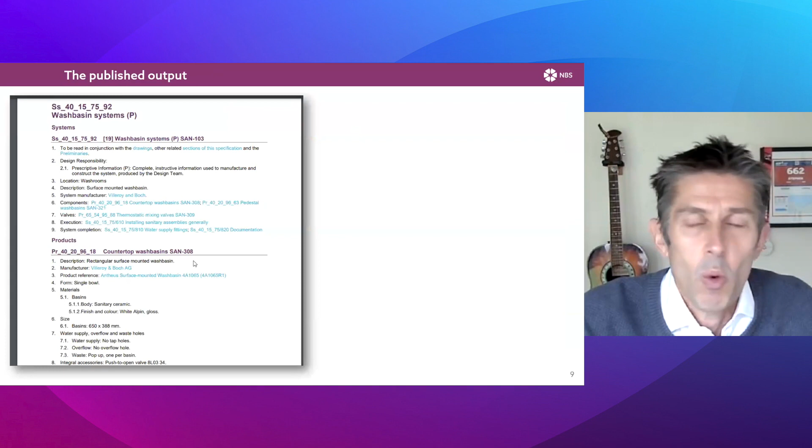So if we jump straight in, what are we trying to achieve here? What's the output? I guess the fundamental output is a coordinated set of drawings, schedules, and specification, so it's all saying the same thing. You say it once in the right place, and you can publish it in many places by using modeling tools. That's what we want to achieve.

Maybe as a stretch goal, we want to have well-structured information in formats like COBie and IFC, which Chris will also touch on. But that fundamental goal is to create a coordinated set of project information. You've got a well-structured specification on the left-hand side, and information exported from the 3D model here - a little annotated 3D view and coordinated schedule on the right-hand side.

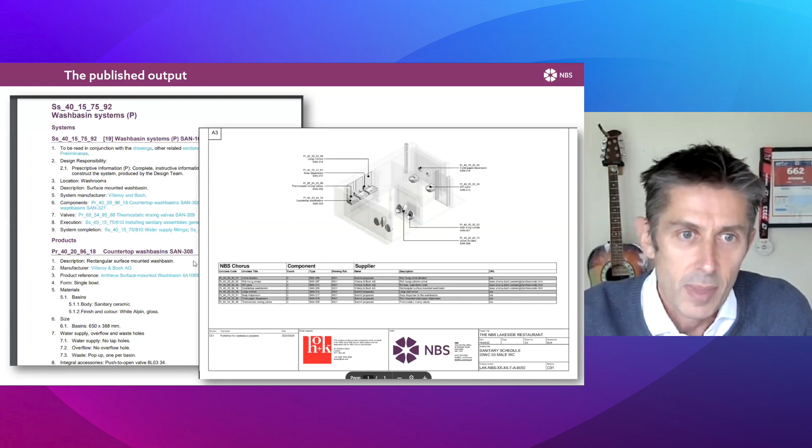The primary thing at NBS that we use to structure our information sets is the Uniclass classification system, which has a number of tables. Search Uniclass on Google if you're not aware of what it is, you can learn all about it. There's a number of classification tables looking at different types of objects that define our built environment - things like spaces, you could have classrooms, dining rooms, tools and equipment, scaffolding, screwdrivers, etc. But in terms of the NBS products, it's largely around elements, systems, products, and specifying those.

Each of these tables sits independently - you could use it to classify products in a warehouse that have no relation other than the classification groupings. But by using modeling tools, you can link information from the different classification tables. So if you are designing a building, you've got this entity code that's made up of elements - things like walls, floors, ceilings - you've got functions like heating, cooling, and then those elements are made up of systems.

So by doing your design, you're creating relationships between different types of objects. That external wall could be made up of rain screen cladding, masonry, and a lining, maybe a paint system on the inside. Each of those systems, marked SS for system codes, are made up of products - so it could be 9 or 10 products in a masonry wall, but just to highlight 4 or 5, things like blocks, mortar, wall ties, cavity trays, insulation, etc.

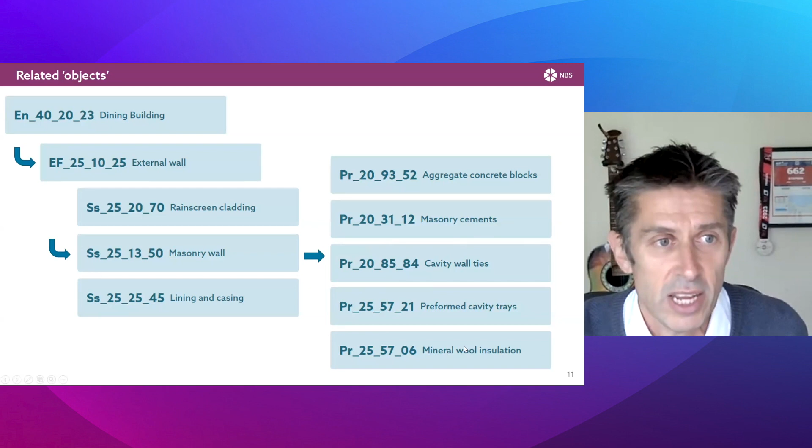NBS allows you to model and specify from the external wall all the way down to the insulation that's in that wall. So let's just have a little look at that.

This is our new early stage specification library that's going to be released later in the year - you might have seen the press release. We're doing this also with BCIS, offering cost and carbon guidance at an early stage. That will allow specifiers to specify at the level of the element.

I've got the Uniclass content on the screen here. We do have a CAWS version as well, but because we're talking about modeling information, today is all going to be around Uniclass. It allows you to specify things at the level of the elements or the function at a very early stage of the project, maybe concept design, where you can capture the client requirements, and then nail down the performance requirements you need for that entire element.

So I need the following acoustic, structural, or fire performance across that entire element that makes the building work. Throughout this modeling exercise, there's what you want in terms of performance, which then gets replaced by what the prescribed solution is to meet that performance.

So I'd like the following structural, fire, or acoustic performance, and then you can specify how that will be achieved by going to the next level of objects. So you're going from wall, which is an element, down to a combination of 3 systems that meet the requirements you're setting out to achieve.

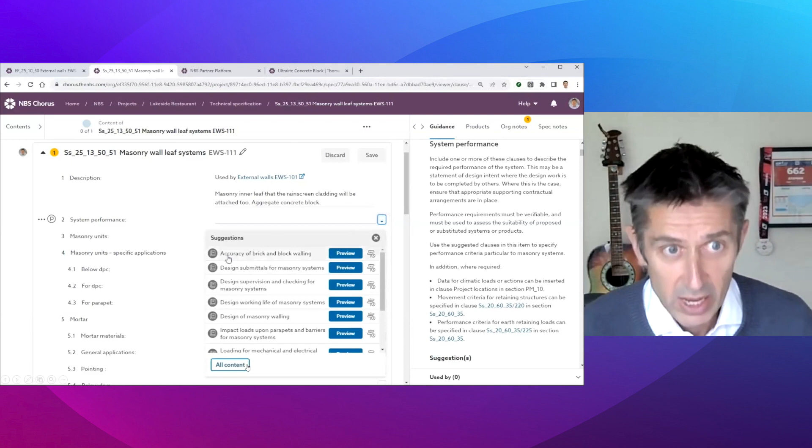So you can start that specification at concept design stage, and then as it develops through technical design, slowly build that up, modeling the links - these are hyperlinks. You come in, and you've got a software sequence here, and you go from the external wall element - once you've made that decision, jump from the wall element to the systems that make up that wall. You can see there the masonry wall leaf system is used as part of the external wall.

Just like we saw at element level, you can specify the performance - might be going into a contractor design package - or you can specify the products that achieve that performance. So you see there lots of clauses you can invoke for performance, and then a big checklist of all the different potential products that make up that system and give you the performance that you want.

So is it concrete blocks? Is it clay bricks? Is it manufactured stone blocks? Against each one of those, depending on what sort of building you're building, you can make that decision and add it to the specification.

So this masonry wall leaf system is going to be made up of concrete blocks. You can remove the items that aren't relevant - so you don't have special shapes or different mortar for below DPC, you can remove those items. And where you have got a decision to make, you make the decision.

So we've now got aggregate concrete blocks, we've got wall ties, we've got mineral fiber slab insulation. Now we've got a relationship between the element, to the system, to ultimately the products that make it up. We move from that concept design all the way through to technical design and specification now, where you specify something like a concrete block.

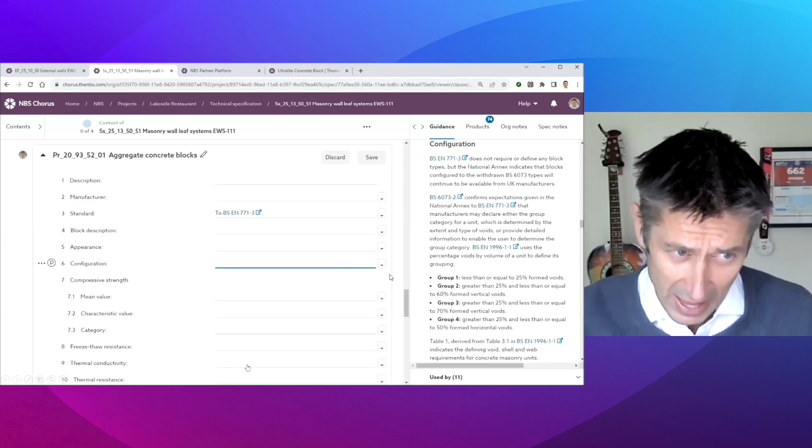Now, the next software sequence here that we jump to just shows how our technical authors research and define that template structure for a generic product. So they've researched what's the standard - BS EN 771-3. And then for each of those technical characteristics, they're defined with suggested values.

So configuration group 1 as defined in that standard, category - either Roman numeral 1, Roman numeral 2 - again using the technical information, the enumerated values from that standard. And then for numeric values, typical numeric values with the correct units that are in, so you could specify the technical characteristics for that particular concrete block.

In addition to NBS, we also model manufacturer information. You saw there were maybe 100 different types of concrete blocks from 6 or 7 manufacturers, and we sort of mirror that data structure with what's available in the market.

This is the data entry platform that our manufacturers use. It's got a few generic properties in, but for the specific technical characteristics, the values the manufacturer picks from are the same ones specifiers pick from. So we've created that common set of rules, that single marketplace.

If the manufacturer picks from the values the technical authors at NBS have authored, you get that little green tick. They can write what they want in, but if they use those defined values, it allows things like comparison and filtering. So if I search for that same category now on NBS Source, aggregate concrete block, you'll see how we've modeled that information.

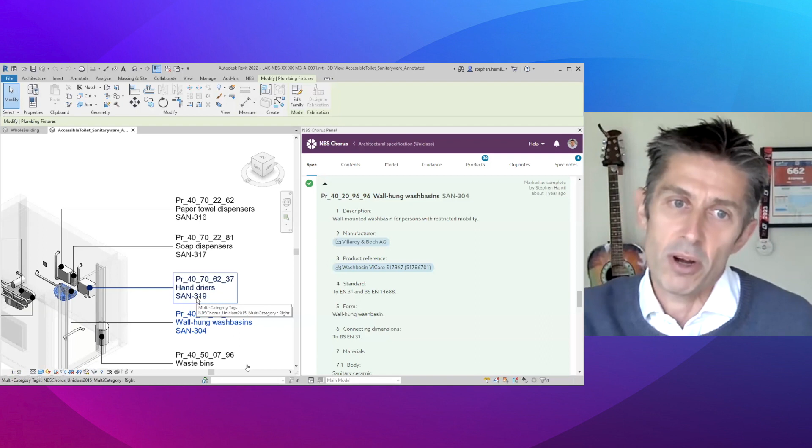The right-hand side there, you see the specification for a wash basin, is now linked and coordinated with the information that ends up in drawings and schedules that's modeled in 3D. So you've got that link between the wall and the wash basin, and the annotation for the wall-hung wash basin on the left-hand side.

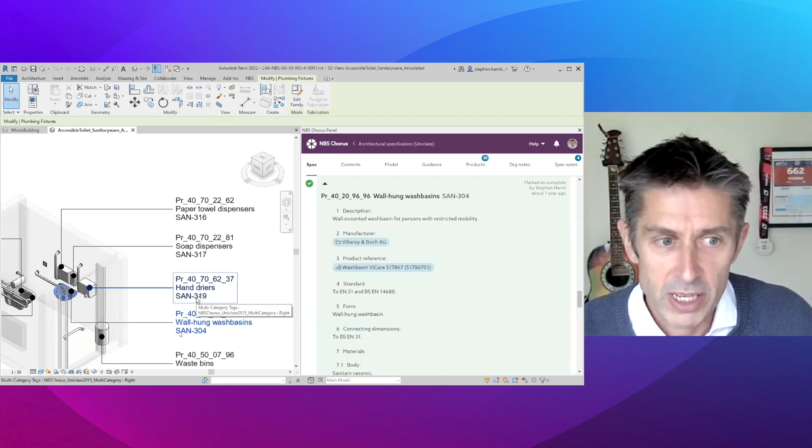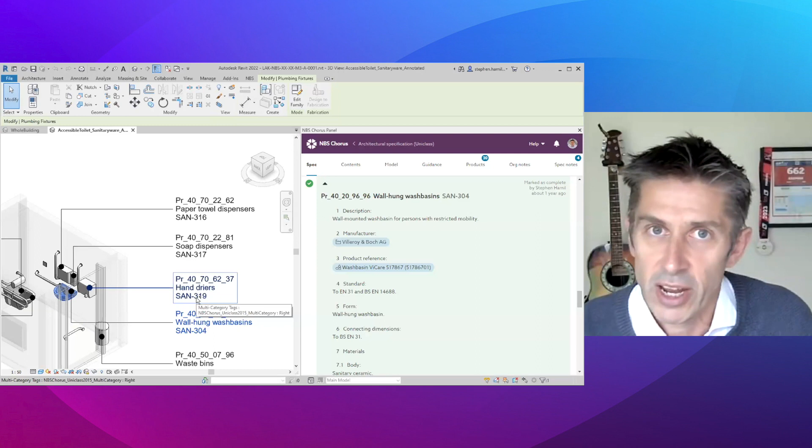What tools has NBS got to help you achieve this coordinated set of information, which gets published at the end of the day and the building gets tendered and built from? So passing on now to my colleague Chris Vickers, Senior Technical Solutions Consultant at NBS, to show how all of that information is coordinated. Over to you, Chris.

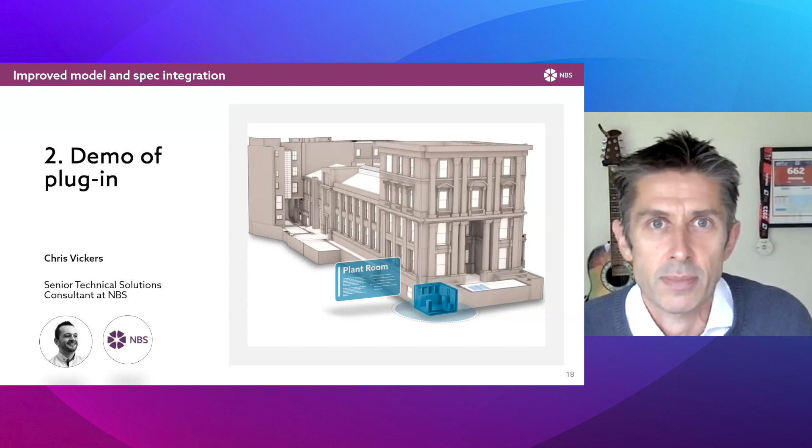Great, thanks Stephen, great introduction there. The purpose of this demo, I want to split into 3 distinct sections. First, we'll look at linking objects back to the specification. Depending on what type of object you're trying to match to the spec, the process is slightly different, but the principles are very much the same.

We'll then look at using information that's pushed into these objects and how we can extract that into things like schedules or annotated tags that Stephen showed on his screen. Finally, we'll touch on exporting IFC models from Revit, taking with it the embedded data we've pushed in, and it'll be quite high level in Solibri. So let's get started with linking objects to start with.

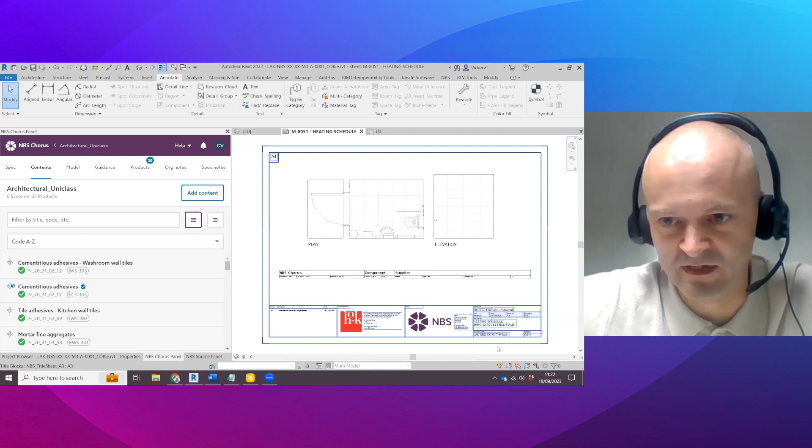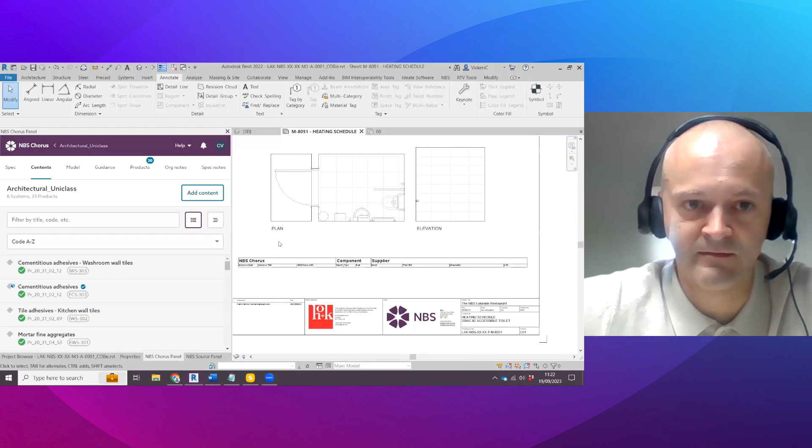Now, first of all, I'm going to just switch to this very simplistic heating schedule, and you see here in my 3D model, this is actually an accessible WC, bound by blockwork. It's got a door in there in the ceiling, so it's a mix of different product types. But currently in here, we haven't got a radiator, so we've got a plan view elevation, and then we've got a setup schedule there that's got the NBS shared parameters set up ready to go.

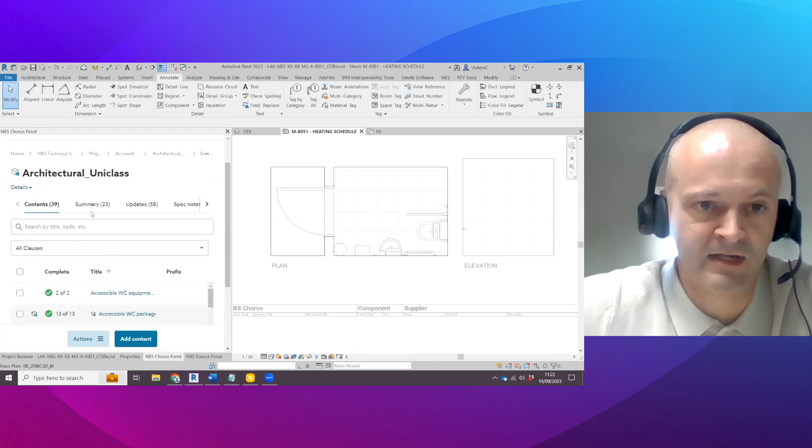Now, first of all, I'm just going to open this view, and I'm actually going to go to my mechanical and services specification. So if I just jump back into the spec, you can see there for this particular model here, we've got an architectural specification, which is currently linked and associated to the model. And we've also got a building services specification here as well.

So multidiscipline specifications, and I'm actually in here as a writer. So you can get a writer license or a designer license. The very first step is just to link these specs with your model. I've done this already, but essentially you hit the three little dots and you hit associate with model. And that's the very first step.

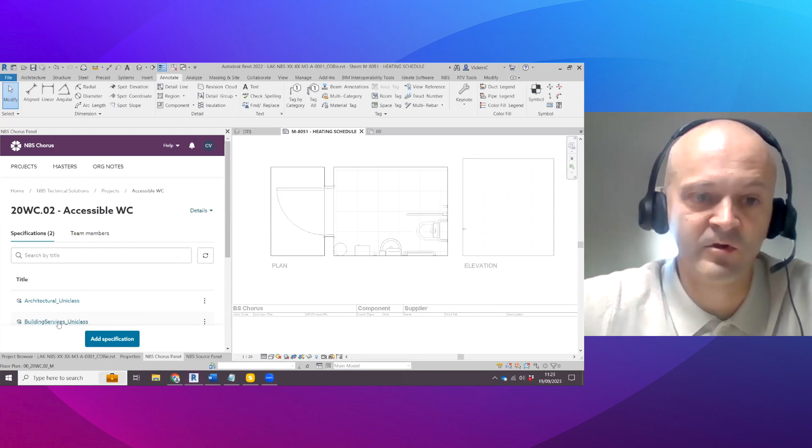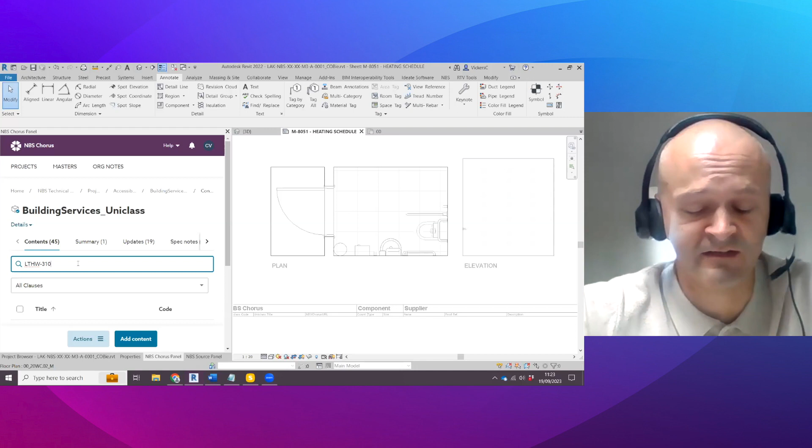But because I'm looking for a radiator, I'm actually going to just look in the spec here just to see what's been specified already. Now I'm using codes here that are aligned to the prefixes in the specification. So low temperature hot water 310, and 3 signifies a product. If it was a system, that would start with a 1. So I'm going to search for that, and you can see it's actually brought up here the radiator clause.

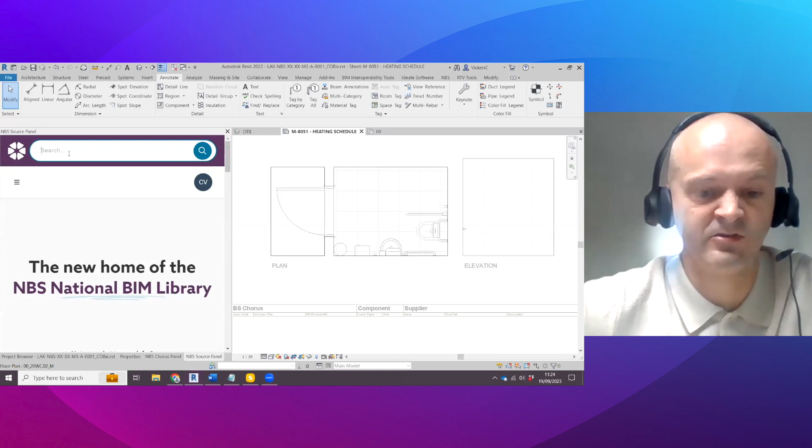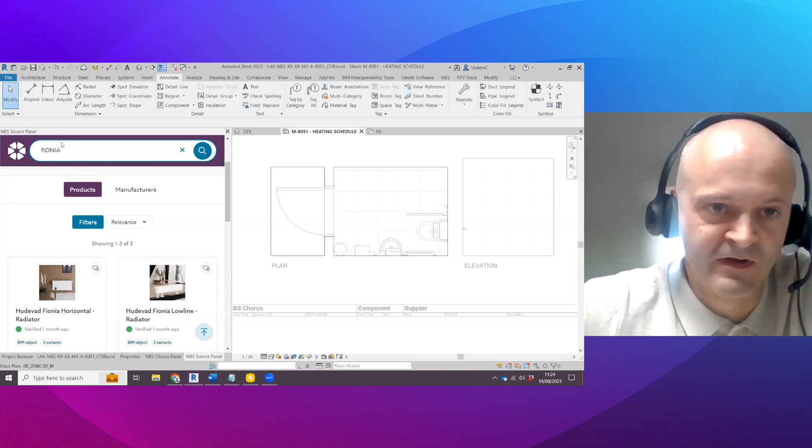So I'm now going to jump across into NBS source, and I'm actually going to search for exactly the same, so Fionia. Got my caps wrong there. Fionia, I can spell it correctly. There we are, so it's brought that. I've been very specific in what I've searched there, and it's brought that first result there is the Fionia horizontal radiator. And it's just a case I'm just going to drag this across into my model like so.

What it might do is it might update it. Yeah, so it's been authored in Revit 2020, and the plugin I'm using is Revit 2022, so it's just doing a quick automatic update of that object. And once this is done, we can obviously place it in the position as required. And there we go, the object's just downloaded.

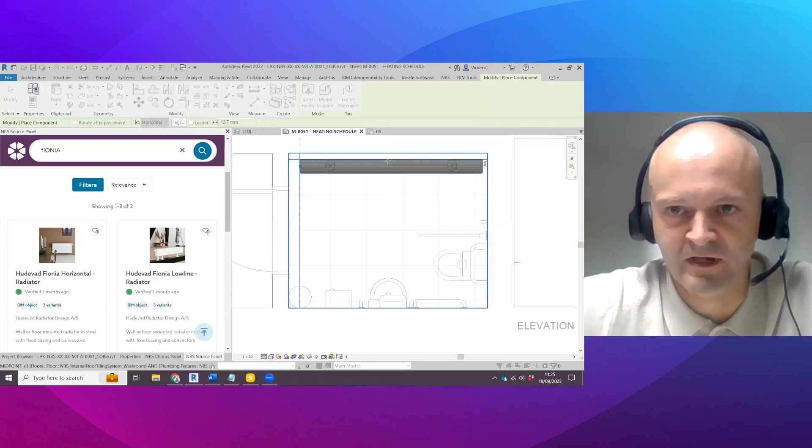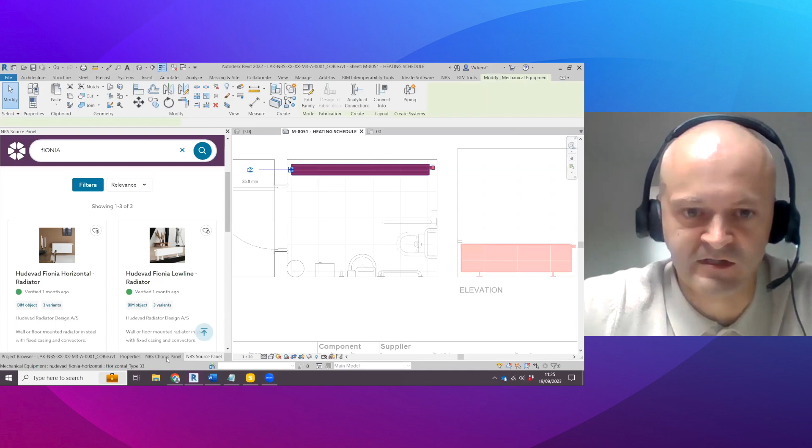You can see by default it's brought in a particular size object. You see there it's a floor-mounted radiator. If I then just click on the object itself and go into my properties, by default it's brought in a type 33, but we actually want to change this to match the spec, and we want a type 11 in there, so I'm just going to change that like so.

I'm not going to bother with changing the sizes. I could do if I wanted to, but what I want to show you initially is once I've dropped this into the spec, and I'll go into my object properties, this is a hosted object. So on the NBS source website, we host manufacturers' objects, or there's objects on there that have been created and authored by NBS to the BIM object standard. I want to use this one just because it's a hosted one.

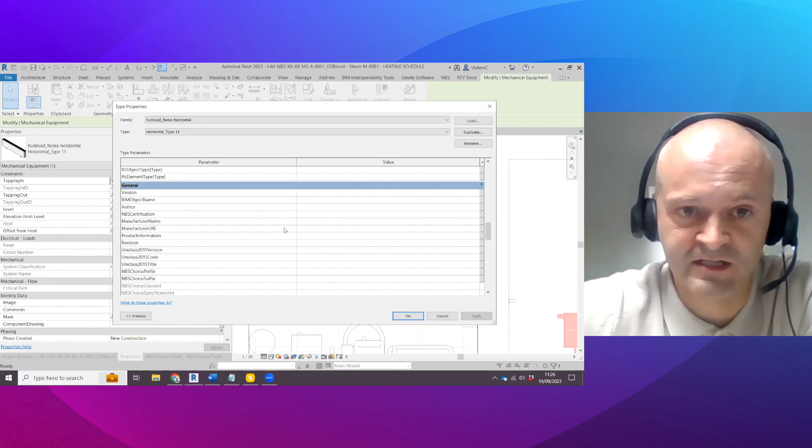It doesn't go to the same level of data and properties that we import or add or associate to these objects. So you can see here it's pretty much blank, and I wanted to show that as blank because the next step in the process is then for me to then link this back to the specification.

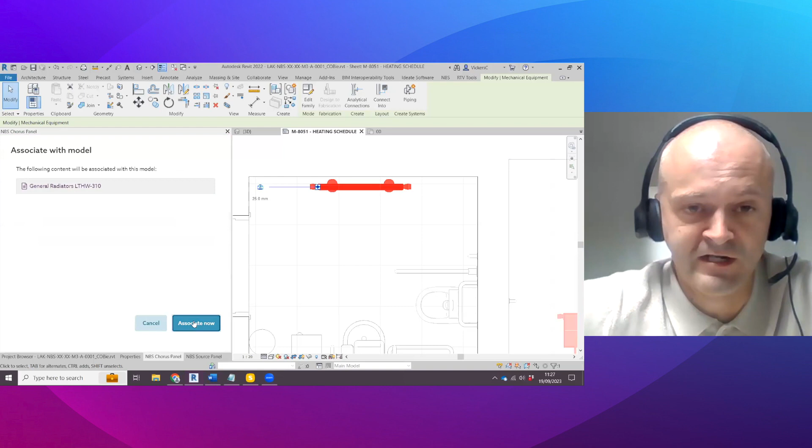So by selecting the object, I'm going to go back into the spec. I'm going to go back into the contents, and I'm going to do low temperature hot water again, 310. And this time, this is the relevant clause. I'm going to hit the three little dots, and then I'm going to associate this now with the model. Associate now, and that'll give me a little prompt there to say that now this object is being successful.

Now, if I go into the properties now, what we should see is we should see new properties that we've pushed in from NBS Chorus into the object.

So now we've got full classification to Uniclass. We've got the suffix from the specification as well. And then we've got 3 read-only GUID properties here. That's the clause of the actual spec, where I've just made the association. We've got the actual specification ID, and we've also got the project ID as well. So all that information is now embedded into this object.

And then you can see we've now got these additional properties. We've got NBS Chorus category, which is the clause number and title. We've got a manufacturer product URL — this is a link that will take you back to NBS Source to that particular product page. And then we've got the product reference, which is the name of the product, the manufacturer's name, the chorus description, which is the actual description within the specification itself. And we've got the chorus URL link in there as well.

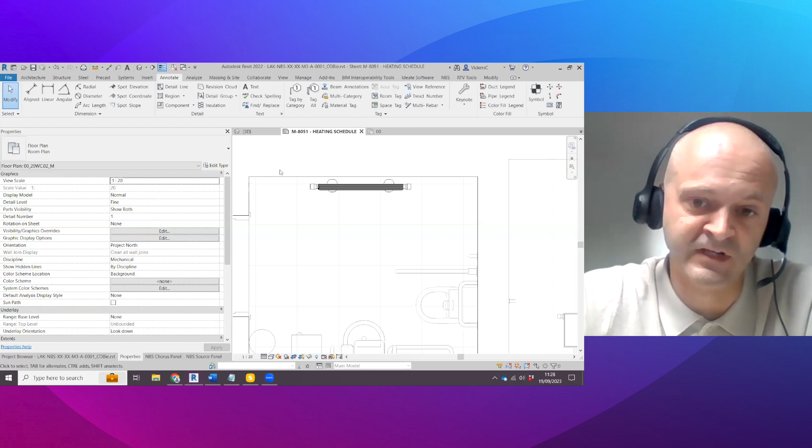And you can see I've had to do no manual work to push that information into that particular object. So those are the new properties. We've actually expanded on the number of properties we've pushed in there, and this is based on user feedback — they wanted to use more information in the drawings. So that's what we've gone ahead and developed.

And then you can also see, as I zoom out, it's also automatically generated this schedule. So Uniclass information, the chorus ID, the type name, the count. There's a bit of manual work there to specify the actual size, to make sure the output of the radiator heats the room correctly. But then we've obviously got the supplier information that sits alongside that, and this is all being pulled from those properties we just embedded into that object.

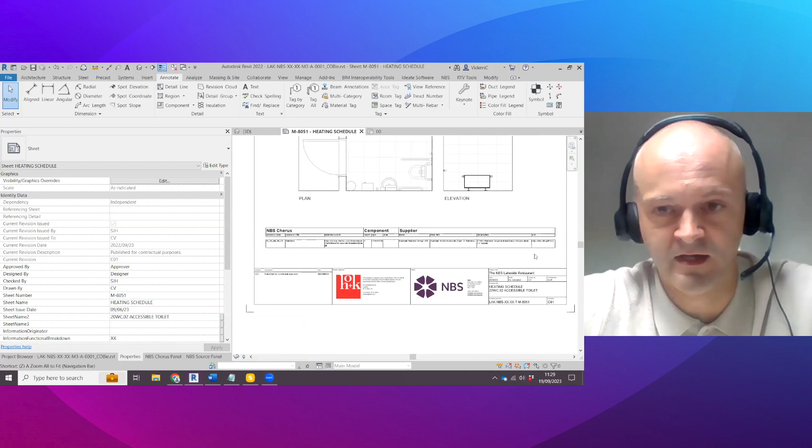So for a component object, it's pretty easy — click the object and associate it via the 3 little dots. Now, if we move to what we refer to as a layered object, or in this instance, this is actually a system — so it's a system object, not a product object — you've got a system that's then built up of different layers.

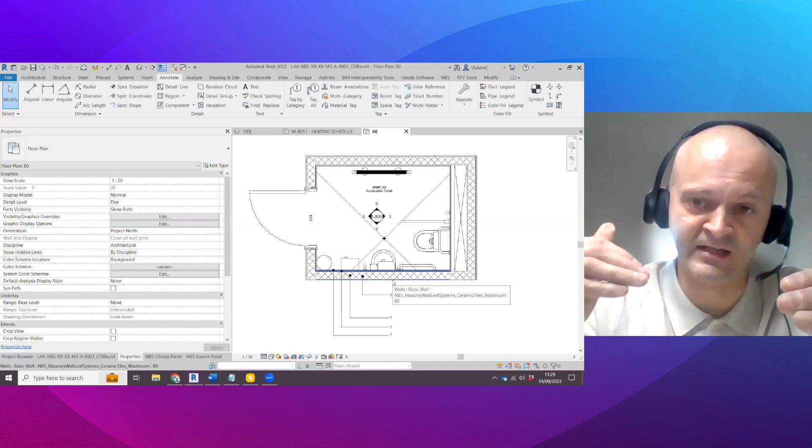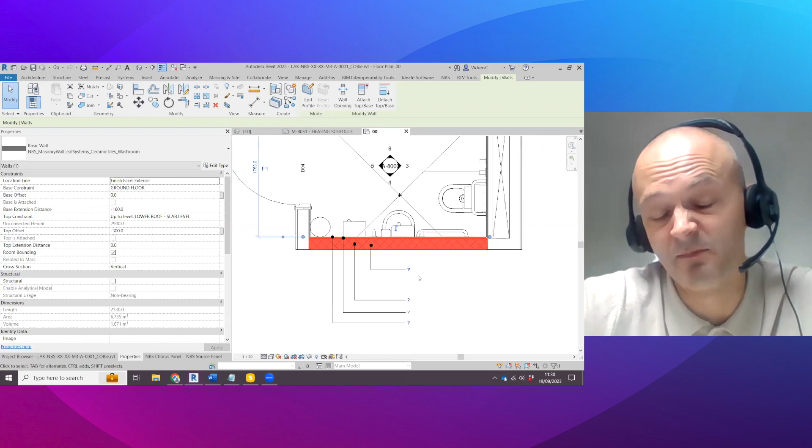And in this example here, it's a blockwork wall, and then it's got adhesive and a tile finish internally. But to associate this to the spec, it works in exactly the same way. So I'm going to click on the wall, and you can see I've got some tags associated here already, and they're all blank — purely because I haven't associated this wall type yet back to the specification.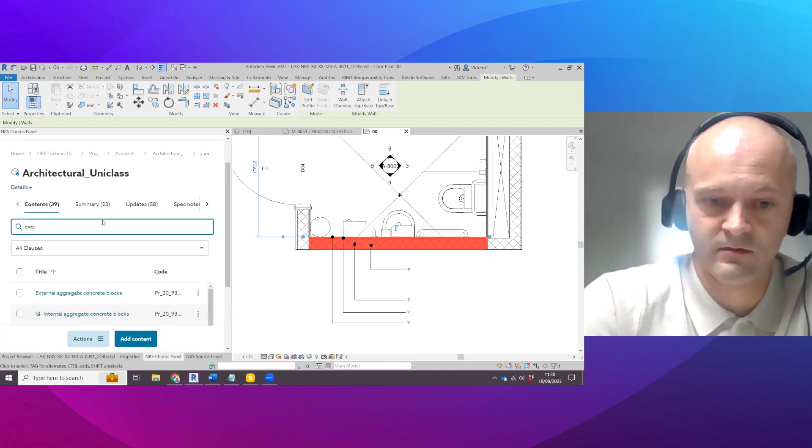So I'm going to go back into NBS Chorus, and this time navigate to the architectural specification. And this time I'm going to use the suffix EWS 102, and the 1, as I mentioned earlier, signifies that this is a system. You can see there it's brought up that little system code. And exactly the same way as previously, click the 3 little dots, associate to model.

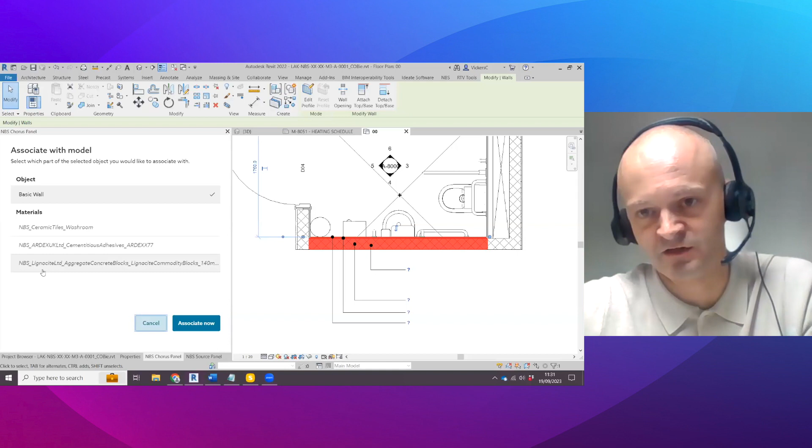Now, this time I have a few options. I can associate at the overall object type level — in this case, it's the wall as a system. It also gives me the ability to predefine the materials there as well, so I can drill down to that next level in classification, from systems to the individual products that build up that system.

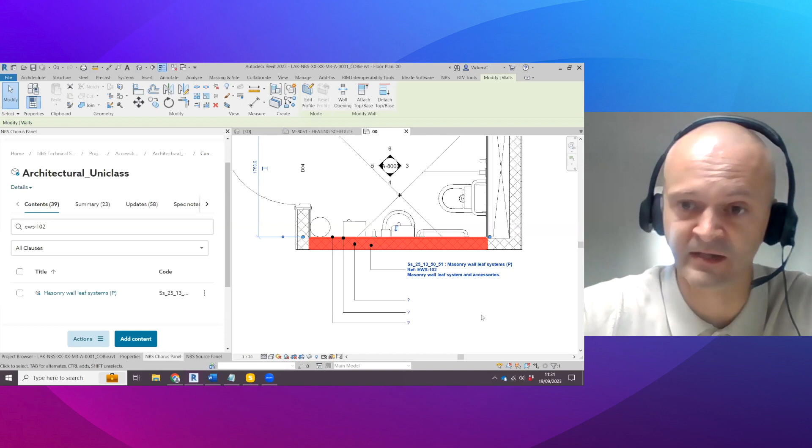So first of all, I'm just going to select a basic wall and associate that to the specification. And you can see straight away there, it's automatically embedded that information, and brought that through the annotation tags — the clause code and title, the suffix reference, and the description within the specification. Obviously, these tags can be manipulated and changed however you want them to appear. This is just an example of how we can customize these to suit.

And then to do the individual materials, you simply work through this. So I'm going to do IWS 307 — now I'm going to do the ceramic tile finish on this layer. I'm going to click associate with model, click the ceramic tile layer there, and associate that now.

And you can see there, again, it's bringing through that information. I'm going to do the same for the adhesive — associate now.

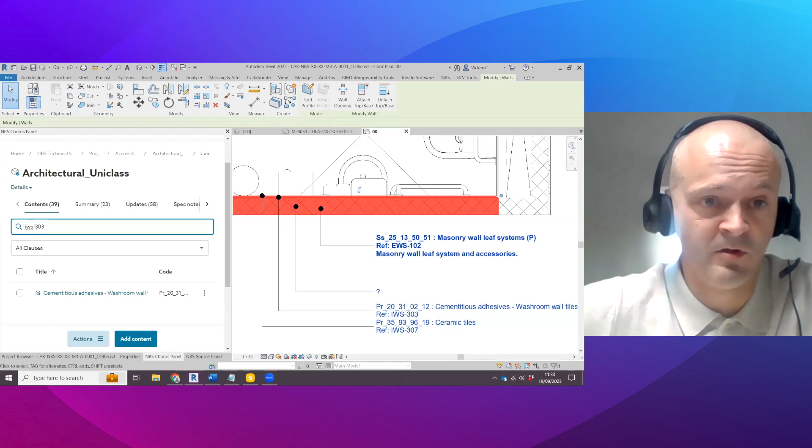And then finally, I'm going to do the same for the block work. So for the block work, we've got EWS 304. You see there we've got internal aggregate concrete blocks, click associate with model, and the last one in the list there is the block work, and associate that. So a slightly different process for layered or built up objects, and it'll be the same in the scenario for a ceiling or for a floor, but really easy. Same principles. The three little dots, associate that with the specification, and you can see there in terms of annotations, it's brought through all that information.

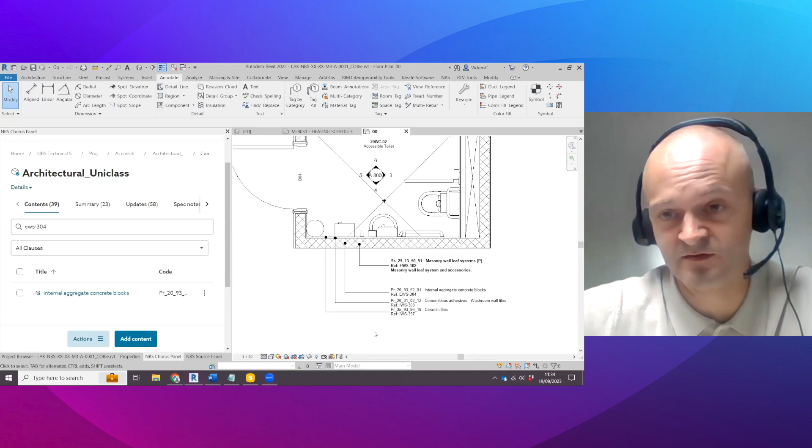So I haven't again done any manual manipulation. It's pulled all of the information live from Chorus within Revit itself.

So naturally, as the project progresses, there might be instances where the information in the spec has been updated. It could be things like descriptions, classification, probably not, but descriptions most definitely could be. The description might change according to location, so above DPC, below DPC. If this does happen, and we'll do a demonstration of how to fix those changes, because they don't automatically then pull through into your annotations. There is a bit of a manual QA check to do with here.

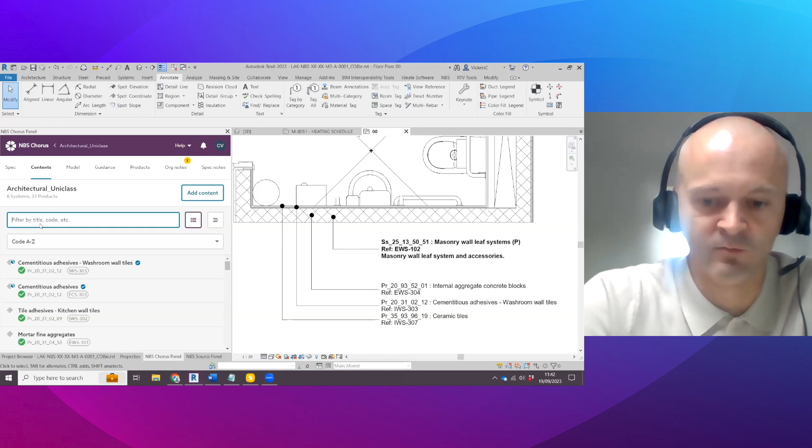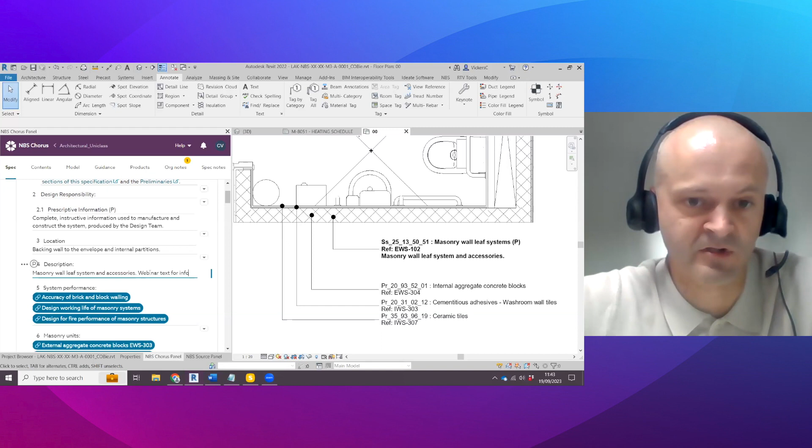So what I'm going to search for now, I know I've been shown suffixes here, but it does also pick up keywords, so it can pick up keywords in the classification title. So for the masonry wall leaf system, you can see there I've started to type masonry, and it's brought up two clauses there, the cement and the system itself. So within the system, I'm going to come in here and change the description. I'm just going to put in here 'webinar text for info', as an example, and I'm going to save this.

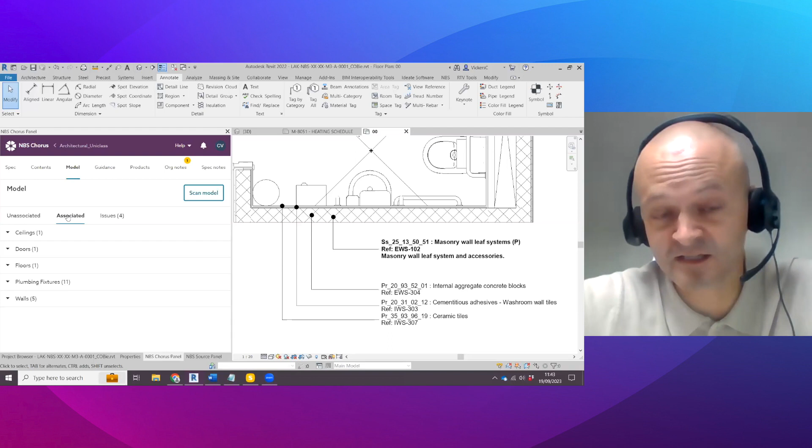Now, as soon as I save it, within Chorus itself, we have a model tab, and just to talk you through what this is shown here, we've got unassociated - these are all the objects in the model that aren't linked back to the specification. We've also got the flip side of that, which is everything that is associated. And we've also got a few warnings in here as well. You can see we've got a few parameters that don't match, and we've also got an error here for the masonry wall leaf system. Now it doesn't tell me it's because I've changed the description, it's just telling me there is an error. So I can come through, go through these lists here, and I can just fix.

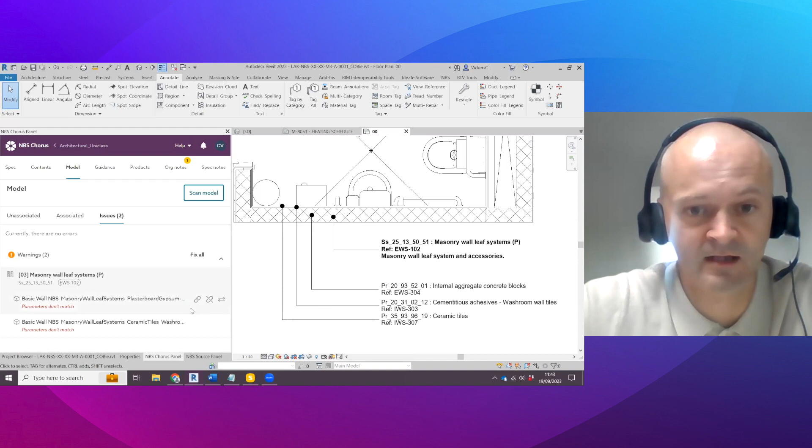I can do a fix all if I want to, or I can work through these one by one. And you can see as I work through them, it's then automatically updated the annotation tag coming through there, so 'webinar text for info' is then displayed. So it's a bit of a QA exercise to go through, and it's quite nice just to get into the habit of going through and validating that the two are in parallel, because you might be working in Revit as a designer license where you can't make changes in the specification. So sometimes the two will become sort of untangled.

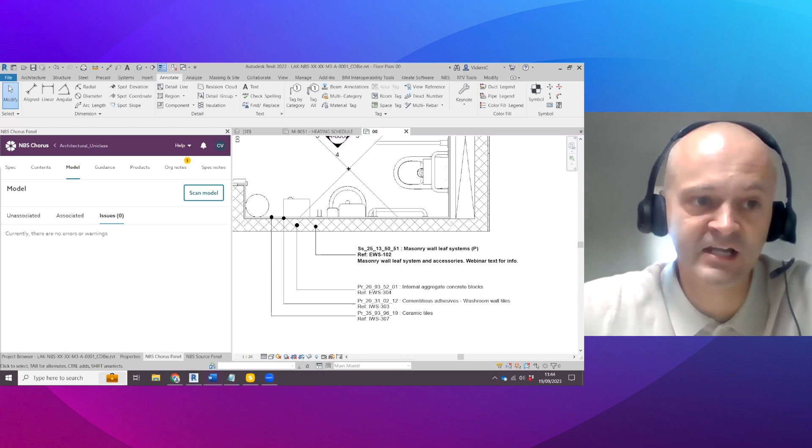So in terms of annotations, that's really how they work - pulling information in, they then can be manipulated and automatically updated. So that time-saving element is really nice when we look at annotations.

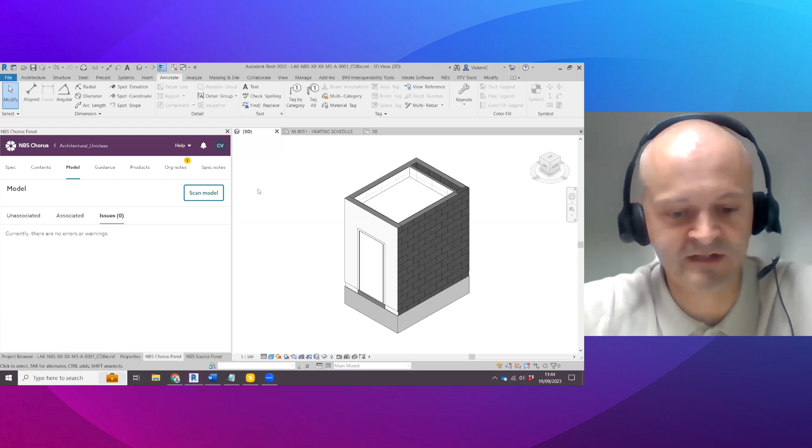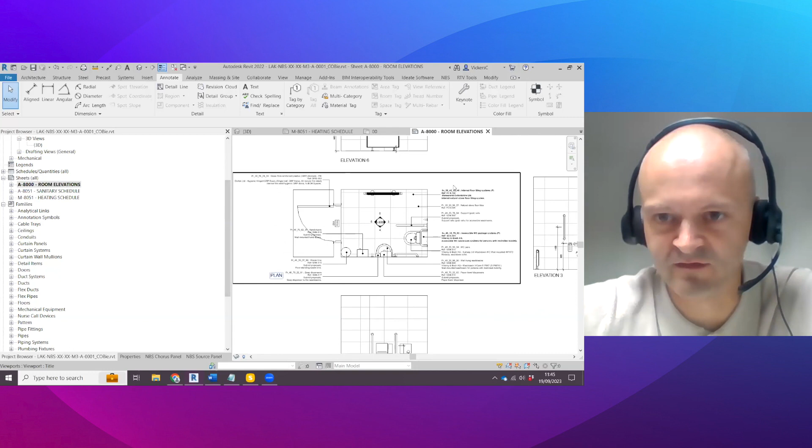The final thing that we wanted to look at is the use of IFC and the export of IFC from Revit. Going through annotations, as I've demonstrated there, is very much in terms of outputs what we've been doing for many years, not only on a PC, but going back to the early days of specification, where references to the spec and clauses would be handwritten on drawings as well. So typically, you would as an output PDF things like this example here - these are room elevations, and you see everything sort of annotated up nicely there, all the different components, etc. But we've got to think about the bigger picture, and not just sharing information with the design team and contractor and specialist subcontractors, but also maybe thinking about things like facilities management and the in-use side of it.

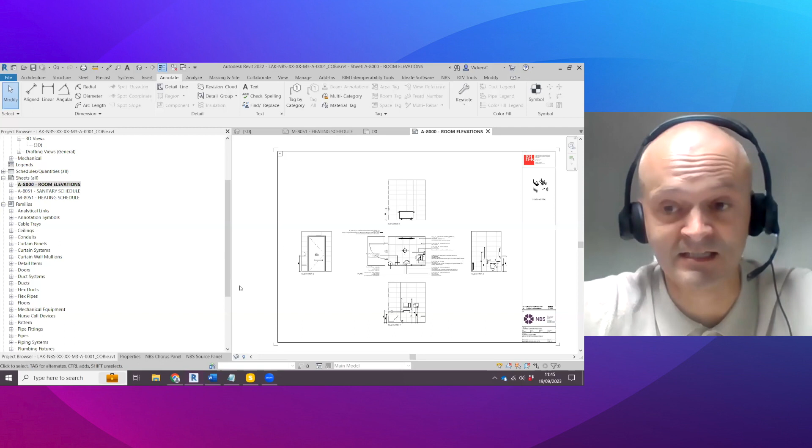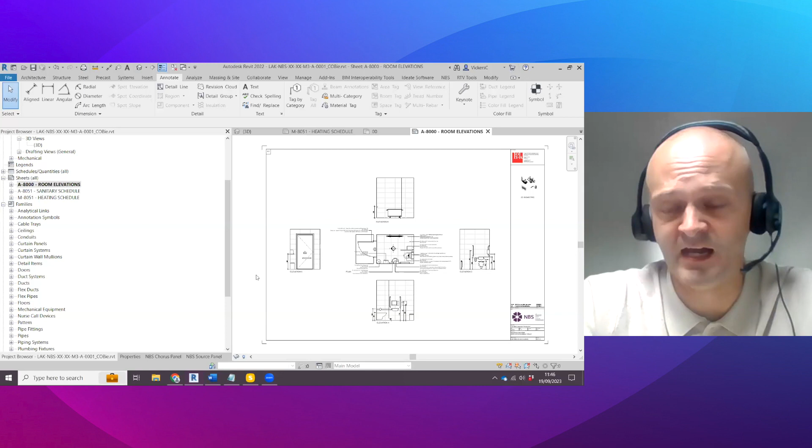And that's where really IFC comes into play. It's supported within the ISO 19650 documents as well. So just to talk you through some of the things we've been looking at to help the export of IFC, Stephen's already mentioned the work that we've already undertaken, looking at the relationships between Uniclass classification and IFC classification - that's very much object type in the IFC world.

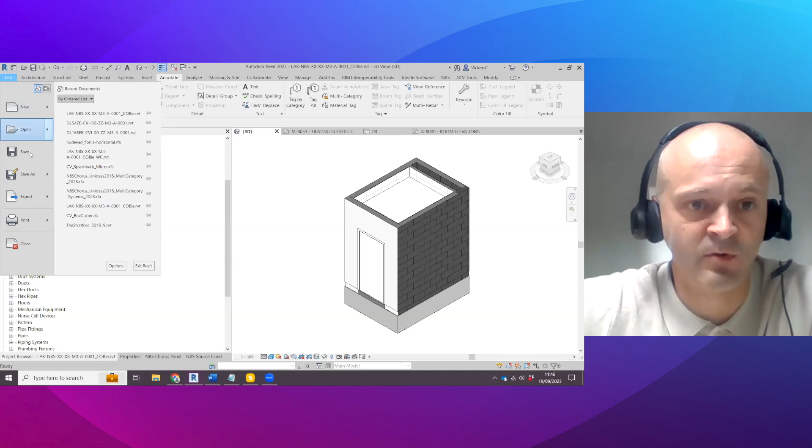Just to show you an example of IFC exports, again using this very simple 3D model. First of all, I would have to be in a 3D view. And then if we look at the export settings in IFC, we'll talk you through some of the things that we've been looking at. So we've set up our own step file.

When I say step file, it's the current setup that we've pulled together here. I've named it NBS COBie. If I just click modify setup, I'll talk you through some of the key areas here that we've looked at. It's mainly to do with classification settings, so how we can export Uniclass from Revit and take that into an IFC file.

You see we begin to populate a lot of the Uniclass metadata - the name of the specification tables, who's the publisher, and edition. For edition, we've indicated here the latest versions of those tables, so elements is 1.13, products is 1.31, for example. The edition date is aligned to the last time the tables were updated.

And because they're updated every quarter, we've just picked that time of when we've embedded this information. We've got document location, and then we've got classification field name. Now this links directly to IFC classification in the IFC schema world, and these are the two properties that we're actually pushing into our objects. So these are getting embedded, and these are displaying the clause code and the clause title. It's just telling Revit here that when we go into the IFC world, they're the properties that we want to pull with it, to pull that classification information from the objects.

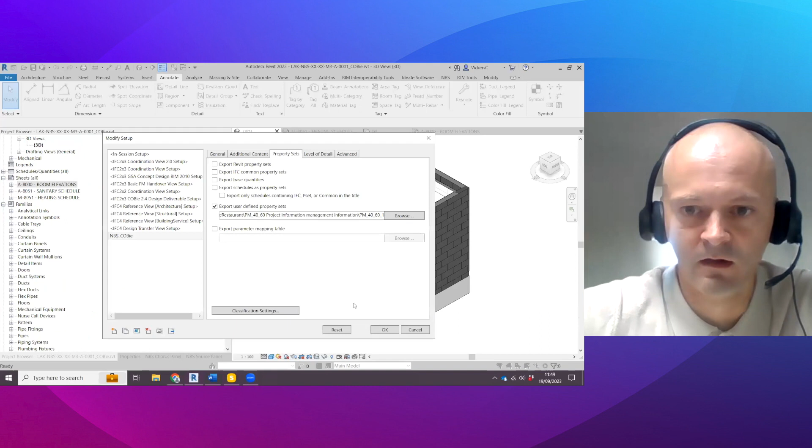One thing I didn't show - if I just cancel this, and if I just click on the wall, I'm just going to quickly show you the wall properties. Because if NBS do author content, we always embed by default IFC information. We've got general information such as the name of the object, who the author is, the version of the object.

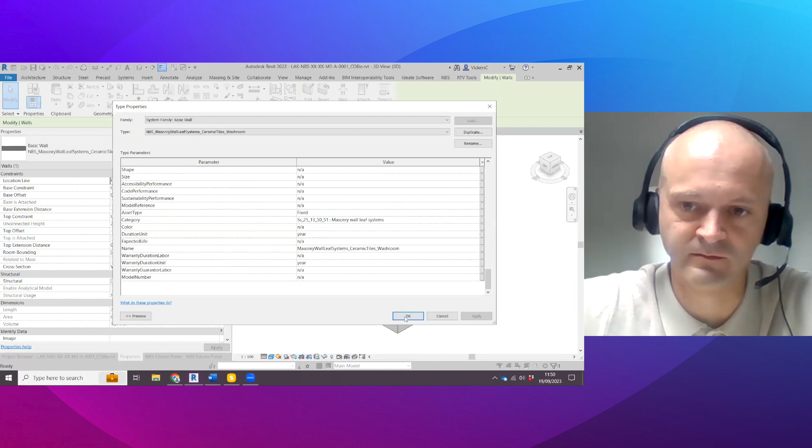You can see the embedded properties from the specification, but then we've also got Chorus information in here under other. These are all any object by NBS authored to the NBS BIM object standard. So that's why we've got a mix of hosted, which might only be the geometry and the sort of functional properties in there, but if they're authored, we in addition include all the data side of it in there as well.

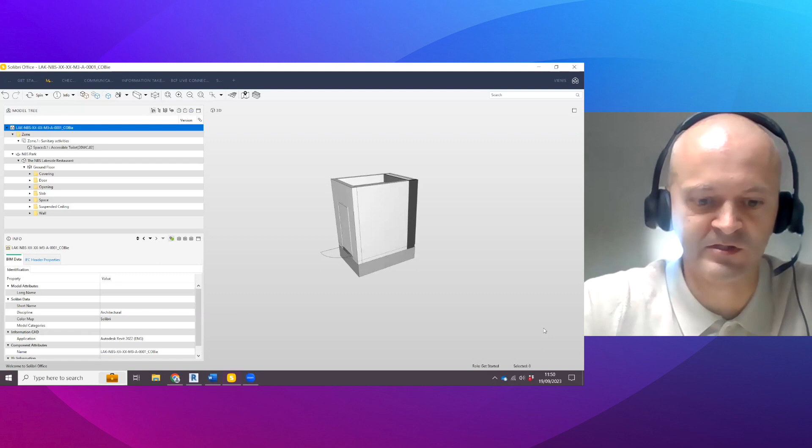So once we export that to IFC, it will take all that information via the mapping file and via the classification and metadata into a software like Solibri. You can see on screen here, this is the very simple model exported. And if I just switch off the walls, for example, you can see in here it's brought with it all the different components in there as well.

So just to talk you through a few things in Solibri, you can see we've got the model tree on the left-hand side here. So we've got the project name, you can see we've got zone information coming through here, and then we've got the spaces come through here as well.

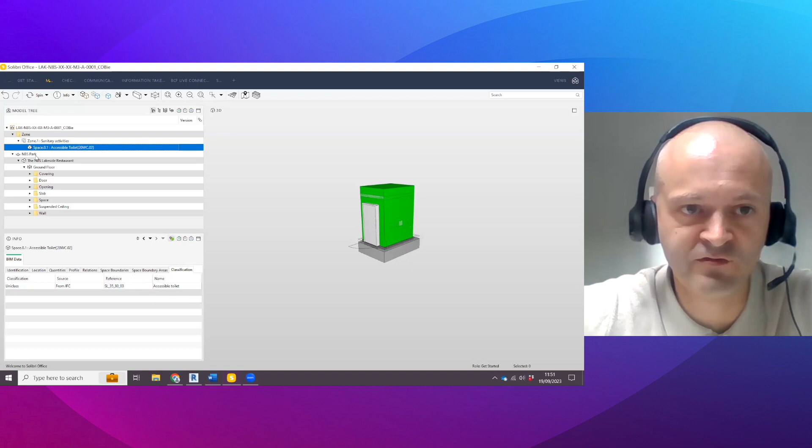I'll just click on the classification tab here. You can see that it's pulling through Uniclass, pulling through the reference, the code and the title with it. And as you go through the tree, we've got the site information, so there's the entity table reference there. And then as we work through into the ground floor, which is a level, you've got all the components that are on that floor.

Really nice to see that classification Uniclass come through as expected. Then as you click on the components themselves, you see that at product level, PR codes are coming through. We've also got some IFC standard property sets, so that's the manufacturer occurrence and manufacturer type information. It's also brought through all the COBie property sets as well. We've got assets, the COBie information, the warranty information, and we've also got the general information in here.

We've also got the NBS specification tab as well. So these are all the properties that have been pushed into the objects on the fly at point of association to the spec, and you can see it's brought everything with it. It's also brought with it clickable URL links as well. If I just click on the link there, it's brought me straight to that .tech page, which is really nice. And it's the same for any other object in here.

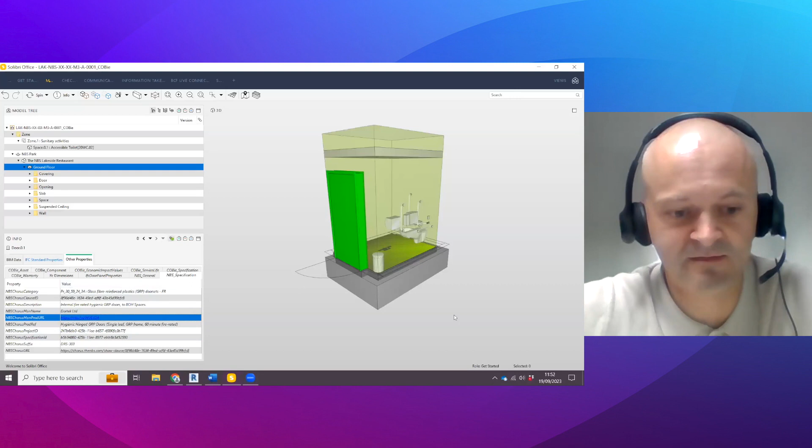I can click on the toilet. If I just get rid of my space and come down into my components, I'll use... let's have a look, let's do the wall. We'll do the wall there.

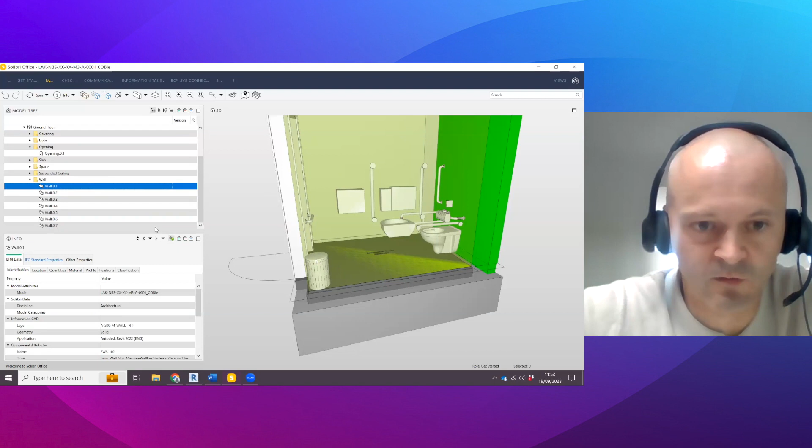Again, all the classification information is coming through. So if I just turn off the space in my model and click on the individual products that make up the Doc M pack, you can see WC pan. Again, it works in the same way. All that information is being pulled through, and I click on the link there, and it will take me to this product page, like so.

Once you're on this point, it's probably worth noting that it's using the permalinks on NBS Source, so it's that point in time that the object was downloaded, or the point in time that it was associated to the specification. So in 3 years down the line, this product might have been updated, so you'll get a prompt there if you hit this landing page and it's out of date. You get a prompt to say this product has been superseded, do you want to view the historic information?

But you can see at this point here, you've got contact information for the manufacturer, and you've got all the specification data that sits alongside that, all your objects, etc. So from a facilities management perspective, being able to use the IFC file to look up manufacturers' products, where you might find contact information, which sits in parallel with COBie data - that whole idea of being accessible.

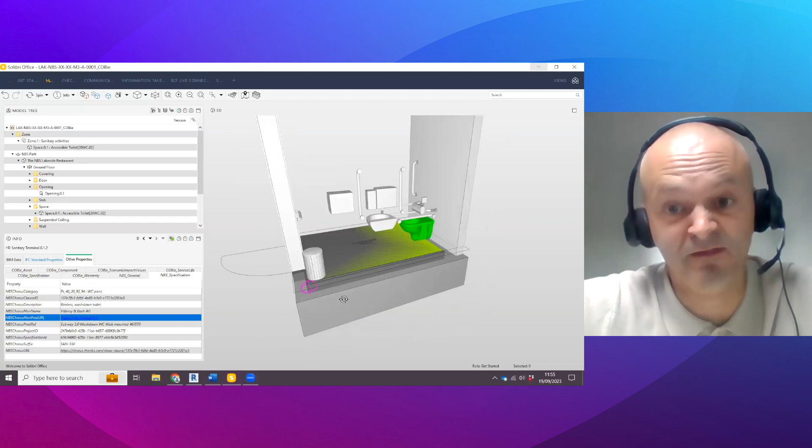So using, repurposing the data from Revit, but just using it in different ways - a really nice way of being able to think about the value of data. We spend a lot of time pulling data together, it's just how then we use that to suit what it is we're trying to do.

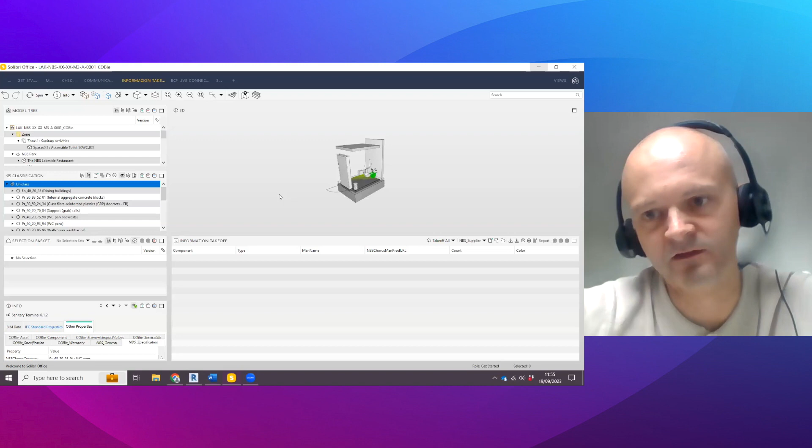Once obviously all that data is in there, you can see on the tabs it clearly indicates it's come through well structured. We can begin to think about how we could potentially use that information to pull off run reports. Again, just trying to think about some of the things that we might do - this is all quite high level and simple examples here, but we've got a few set up here already.

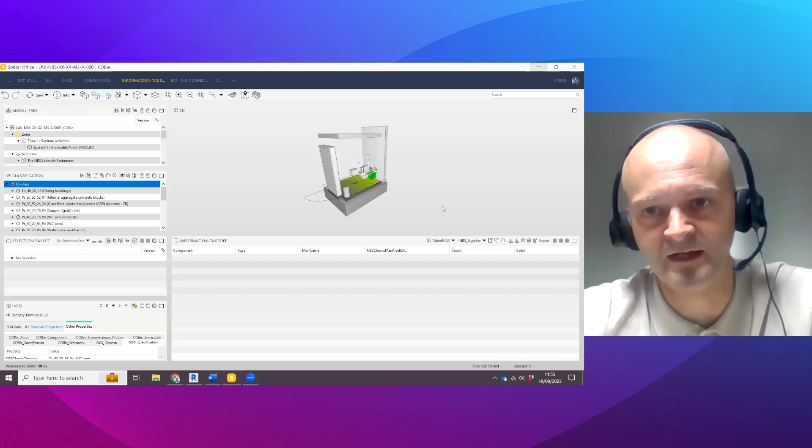So if I want to see which suppliers, in this accessible WC room, of all these products have a sort of nominated manufacturer against them, we can run takeoff reports here. You can see I've just run a report, and the door's got a manufacturer portion to it, so the ceiling, the wall here has, and the toilet has. Again, these are all clickable links that'll take me off to the relevant pages, like I illustrated before. So the wash basin again is from Villeroy & Boch.

So a really nice way of being able to use the information in the IFC model. What's quite nice as well, I showed you in Revit there, we can run a report and see which objects in the Revit model, aren't actually associated to a specification. We can do something very similar within Solibri as well.

We can do a takeoff here, and it'll just show me everything that's not associated to a spec. In this instance here, it's actually bringing in a few others. It's bringing in the space. But if I were to do this side by side with the Revit model...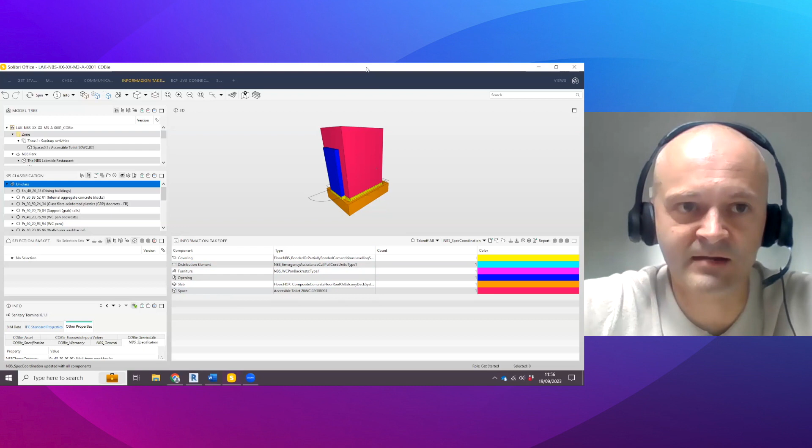If I go back to my model here, my model tab, we should see some commonality here. It's pulling in the same information. It's telling me there's a covering in there, there's a slab there, which represents the two floors. So maybe there's a contractor who isn't using Revit. They could run these reports within Solibri and pull the same information, which is really nice to see that the two do mirror one another there.

So that was quite high level in terms of Solibri, but just to give you a sort of insight of taking the information from one proprietary software like Revit into something like IFC, and then being able to navigate through the information that's brought with it. Hopefully that was insightful and useful. I'll hand back over to you now, Stephen.

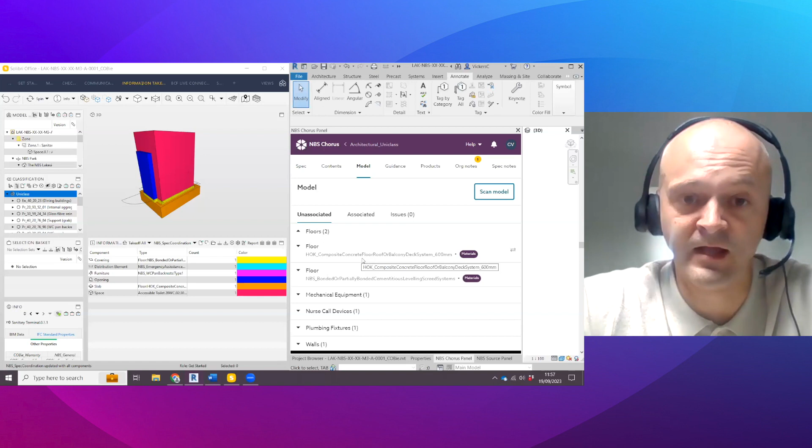Thanks very much. Yeah, thank you very much, Chris. That was a great live demo of not just Revit, but also seeing it in Solibri as well.

So just to reinforce one or two of the things that Chris presented there, I think the first one is the additional properties that we're now sharing between Chorus and the modeling environment. And that came from user requests, like the ability to put spec notes on drawings, the ability to do things like drop the manufacturer name that's been specified, into things like schedules or even annotations as well.

I think the big thing at the moment, if you get something like a 3D IFC model, how much can you trust the information that's in there? How many times have people maybe just used a 3D object with a manufacturer name in that doesn't match the spec? By getting that coordinated first in tools like Revit before going to IFC and having those URLs for the manufacturers, hopefully it just really improves the quality of information in something like an IFC export at the end.

The last thing to mention, I was talking to Chris before the webinar, like prior to joining NBS, Chris was an architectural technician at Faulkner Browns. And we're saying, if you're working on a big project, what are the roles on that project? We're saying maybe one or two people will work on the specification, but you might have 4, 5, 6 working on the drawings and the schedules.

What we've got at NBS now is the ability to have different license types. So you imagine 6 or 7 people working on the same project. One or two of them would typically work on the specification, but we've now got something called designer licenses, which is a low-cost license to NBS for those working in tools like Revit on the design. They've been pretty successful this year. There's a lot of practices now using that, so you can get NBS use across the practice, but at an affordable price for everyone to have a subscription.